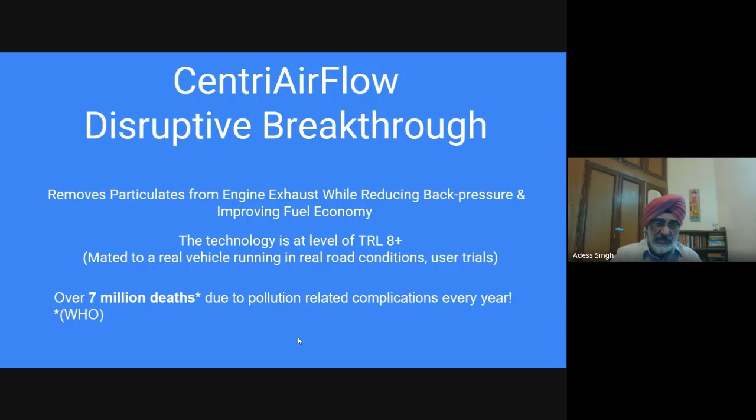And I'll go to the next slide. And I'll tell you one little thing which will help us understand fuel consumption better. Suppose somebody is used to doing a little jogging, and we say, okay, please jog a kilometer and then stop there. He gets his breath back and everything all right. And then we put two masks on the person's face and ask that person to jog back that 1 kilometer. He will stop very early because he can neither breathe out and therefore neither breathe in.

And the heart-lung ensemble is like an engine. So anything that is restrictive will cause fuel increase. Anything that is giving freedom will cause better fuel economy. So resistive methods like the DPF, which Rajan had explained, increase the back pressure and decrease engine power because the voiding is simply not done.

And then the collected soot is burnt inside the DPF. Therefore, smaller particles are released. Although the industry says, no, no, we burn at 920 degrees centigrade, so it's all carbon dioxide, it is not particulate, which is neither here nor there. And more importantly, it has high maintenance and replacement costs.

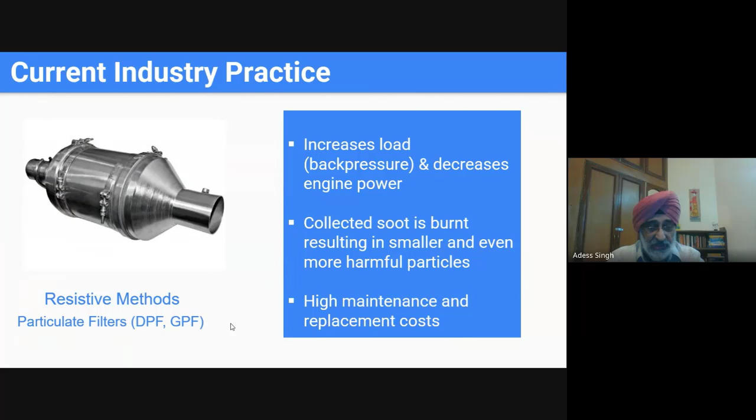CentriAirFlow, what it does. Okay. So what do we do? Most of the time, the industry tries to kill the speed of the exhaust gas so that the sound is less, and so on. We use the speed of the exhaust gas to cause a high RPM circulation of the exhaust gas. It is an extremely high rate because it's a total free vortex circulation. And that causes the gravitational force sufficient to separate the finest particles; even 1 micron is removed from the exhaust gas and sent elsewhere.

Because we are voiding the cylinder better and we are having better consumption, the carbon monoxide level drops greatly. It has been seen in the tests. Because we consume less fuel, we reduce the carbon footprint. And the tests have shown that NOx also comes down to a very high degree as compared to the normal exhaust system.

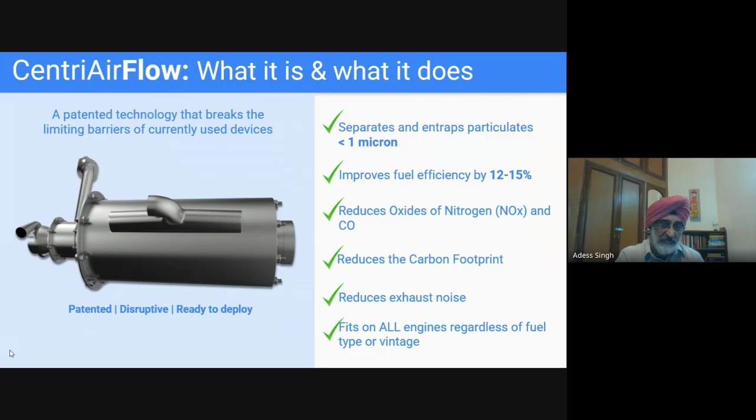Further, sir, the universality of CentriAirFlow is absolutely wonderful. The engine can be of any type, meaning any fuel that uses an internal combustion engine, or it could be of any vintage. CentriAirFlow will simply fit and perform from the time it is fitted and is ready to deploy. Further, for those interested in the commercial aspects, this is patented in India, USA, and Europe. So the commercial aspects are taken care of nicely.

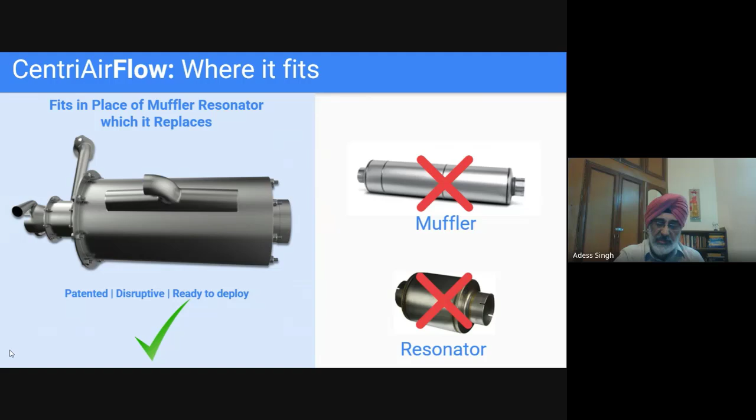The method is we remove the muffler, we remove the resonator, we put the CentriAirFlow and take the vehicle out. That's all. What does the CentriAirFlow look like? This is how it approximately looks from the outside. From the inside it is something like this. I'll take you quickly through this. Exhaust gas from the engine enters port 1 or 2, and it begins to spin because these are tangential entries into a cylindrical chamber.

And on the axial surface of the cylindrical chamber, there are ports and other methods of taking the denser exhaust gas into this entrapment chamber. The entrapment chamber pressure goes a little high, whereas at the center of the vortex, as everybody who's studied geography knows, at the center of the cyclone there is low pressure. So from the high pressure, some gases come into the low pressure area and go in for a second spin, making sure that no particulates go out. The lighter gases move out. That's CentriAirFlow in simple terms.

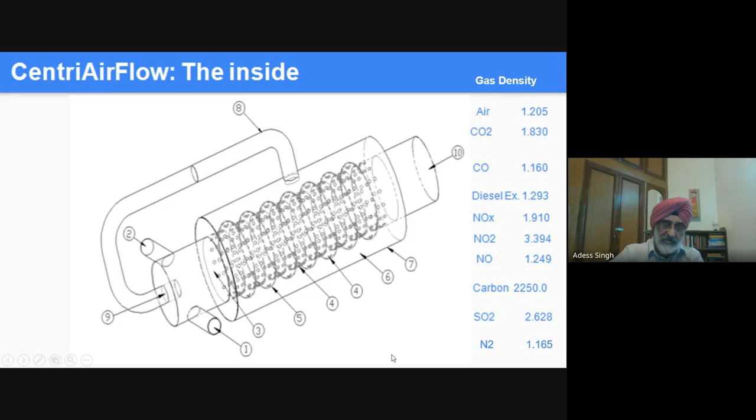On the right side, there are some gas densities mentioned here. I'm going to take that up after a few more slides. Okay, so this was one of the earliest tests in ICAT, I think late 2014 or 15. You see the gas entry here. You see particulates being separated in the entrapment chamber. Those days we used a filter in the entrapment chamber, offline. And then the clean gases go out.

And the G forces are phenomenal. They are very high; if you do the calculations, they come to about tens of thousands of G, whereas particulates can separate even at 50 or 100 G.

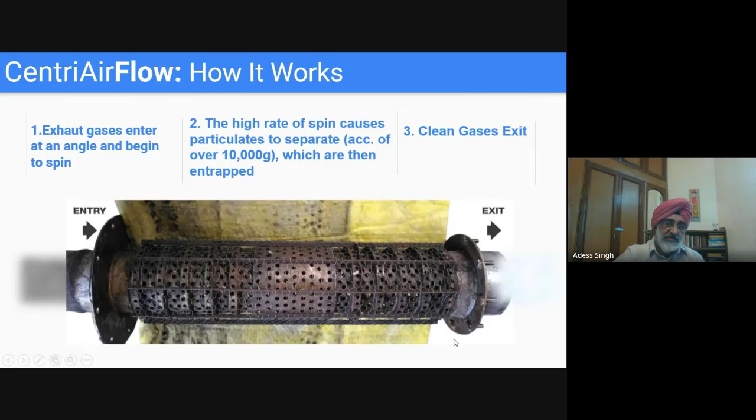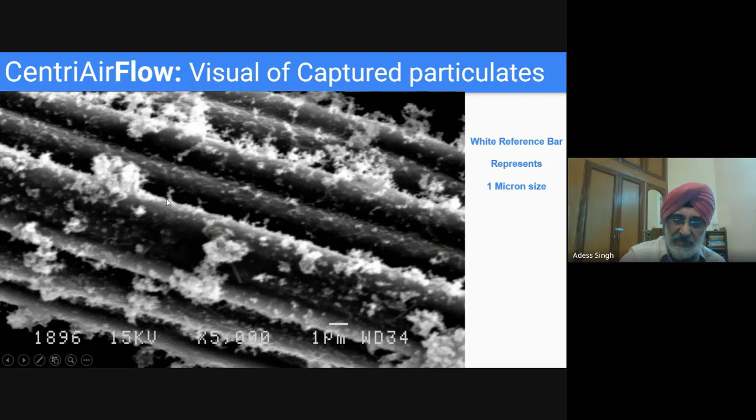And if you want to know what size particulate CentriAirFlow can remove, this is an electron microscope picture of that filter. This white bar you see where I'm putting my cursor represents 1 micron length. You can see that particles much smaller than 1 micron have been individually separated, and then they are agglomerating inside and becoming large. So the fact is that CentriAirFlow removes even the finest of particulate matter without filtration. That's the important part.

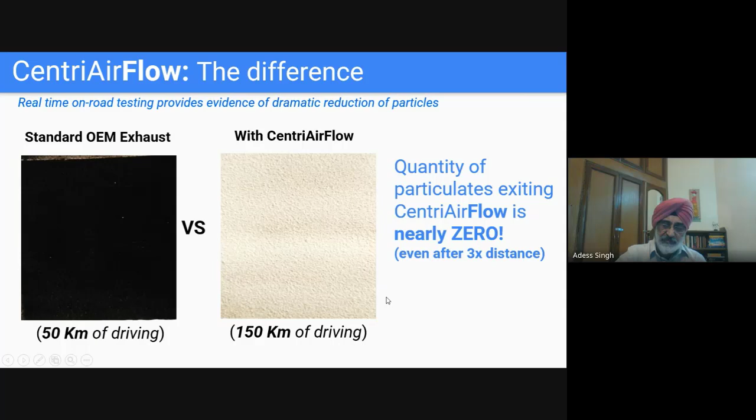And while causing a drop in the back pressure. So we have a Safari, 2006 Safari, and we used to run tests on that. This is an earlier test. A white paper used to be put in the inside of the tailpipe. This is what happens in 50 kilometers of driving on the left side. And with CentriAirFlow, even after 150 kilometers of driving, it remains mostly white. The particulates are all entrapped inside the CentriAirFlow. This is what it looks like now.

And it breaks the limiting barrier of the present technology. You see, presently, the industry is in a pincer movement. The government tells them particulates should drop and NOx should also drop. That is very, very difficult for them. And the fuel consumption: the minute you try to filter particulates, your fuel consumption will go up. Or you try to remove NOx by putting another inline process in between, again the fuel consumption will go up. So there is a gridlock. There's a pincer movement under which it's a negative spiral.

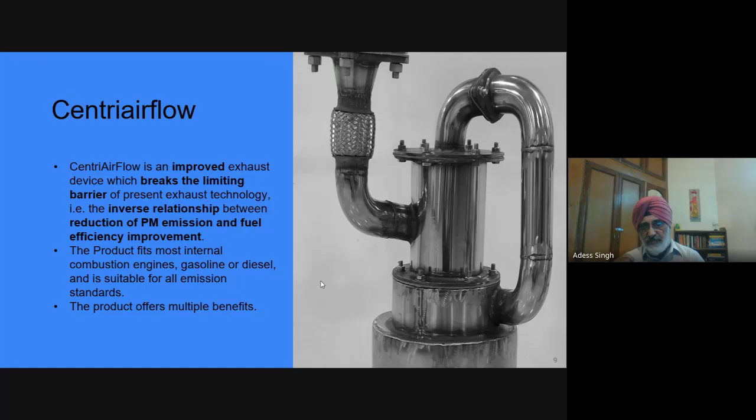So the industry is freed from that negative spiral. You give it speed, you will remove particulate matter. Because of the ease of the flow of the gas, you will have fuel economy, substantial fuel economy, 20 plus percent. And that is there in the tests. So these are the benefits that come from using the CAF, and no expensive exhaust systems as at present. It's lakhs of rupees that go into a DPF and various other technology. In fact, it becomes a temptation for thieves to cut it and sell it in the gray market.

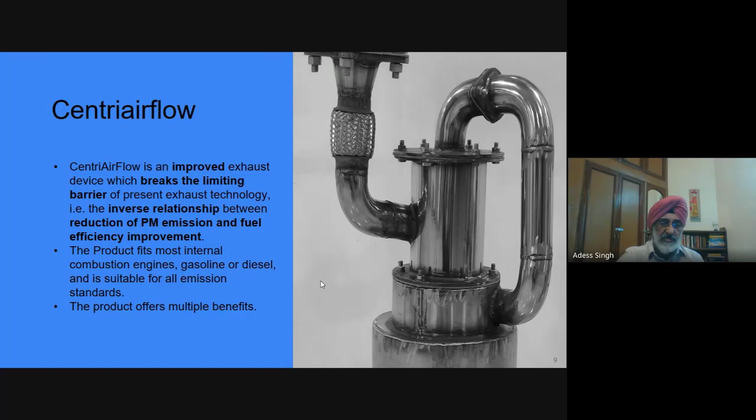Since we got the National Award in 2014, we've been places. We did the initial proof of claims testing in 2016. And in 2018, we were at the Clean Tech Open selection. We were selected at Los Angeles for the finals. Road tests have been done over 1 lakh kilometers. Intellectual property exists, as I said earlier, in India, in the US, and in Europe. And field validation testing is also complete. So we have a product which is ready to fire, with a few more additions here and there, plus of course the marketing costs, and it should be a good business proposition. And also, as I said, a win-win. It is good for the owner, good for the industry, and good for the environment also.

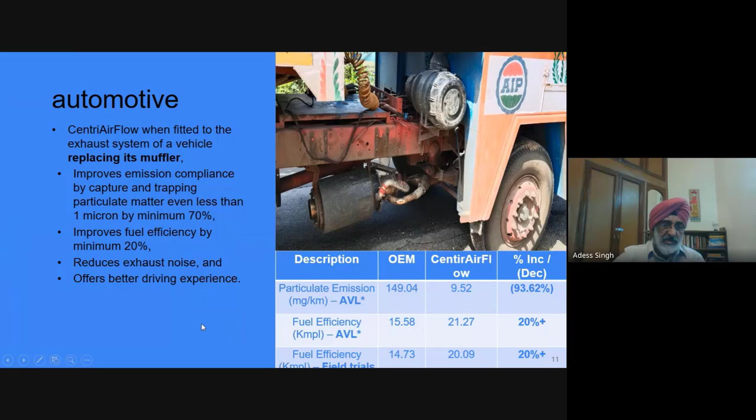This is a picture from one of the field tests that was done somewhere in Chennai. There you see the CAF. It's much smaller in size than the normal long muffler. It gave a fuel efficiency saving of about 20%. And now we come to the other major use of CentriAirFlow technology, slightly modified. When we were describing this to the government, we were surprised to see the response from the Ministry of Power. Anyway, after that, COVID hit, and this effort just got lost.

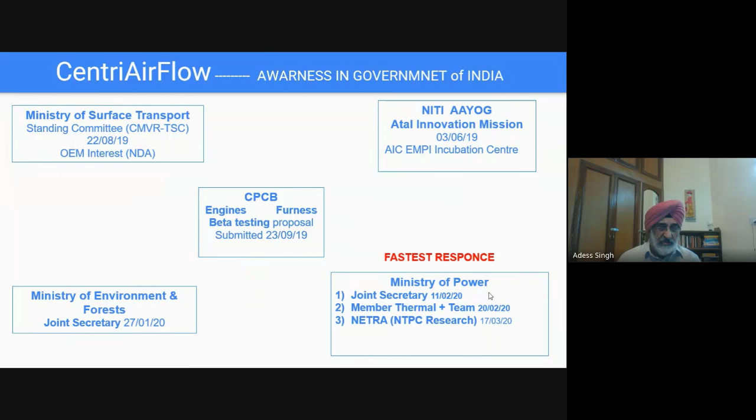We are already at this place with CentriAirFlow. We have done all this. And field trials have been done extensively, as Rajan also told us, on commercial vehicles, which are the major users of diesel and fuel. And if the government understands this clearly, a 20% plus saving on fuel is a huge, huge saving of the national wealth. So with that, I'll bring a close to this presentation.